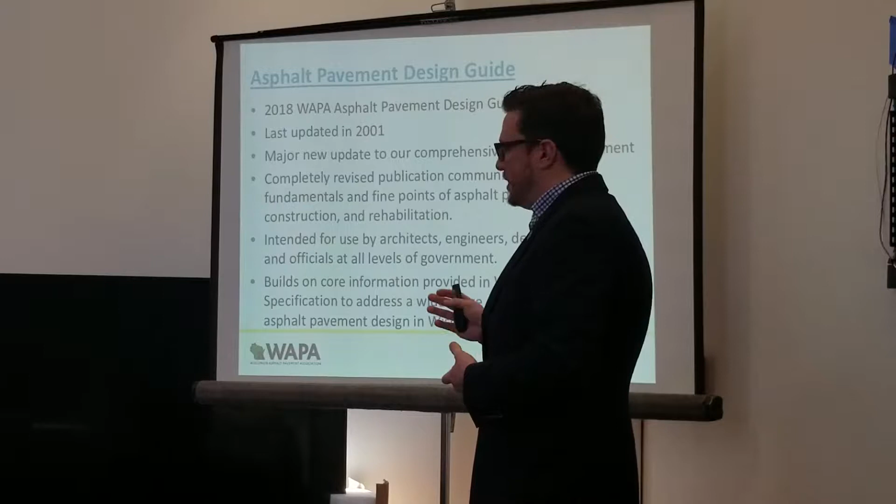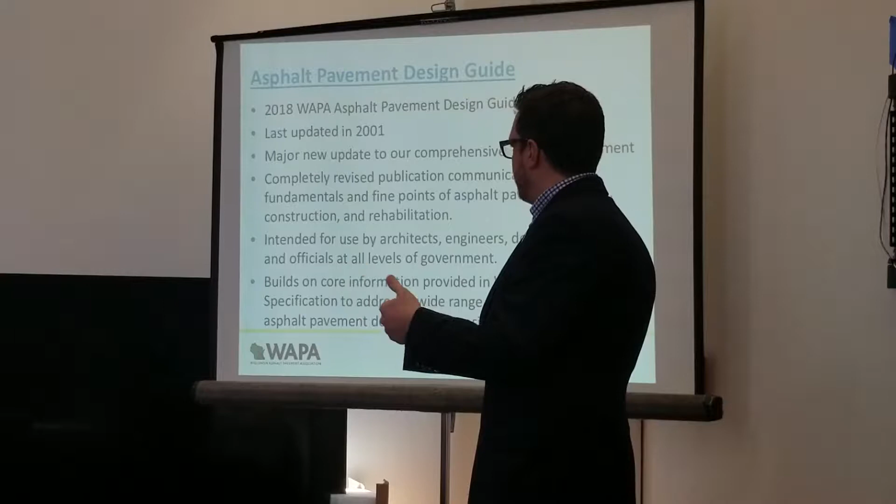Other resources available on our website include an asphalt pavement design guide, a PDF file, with printed copies also available. It's a great resource for picking the right application for your roadways. We also have a parking lot design guide and a whole host of other resources, covering economics like life cycle cost analysis, subdivision street designs on the engineering side, pavement structure designs, and environmental impacts and things to consider when looking at pavement types.

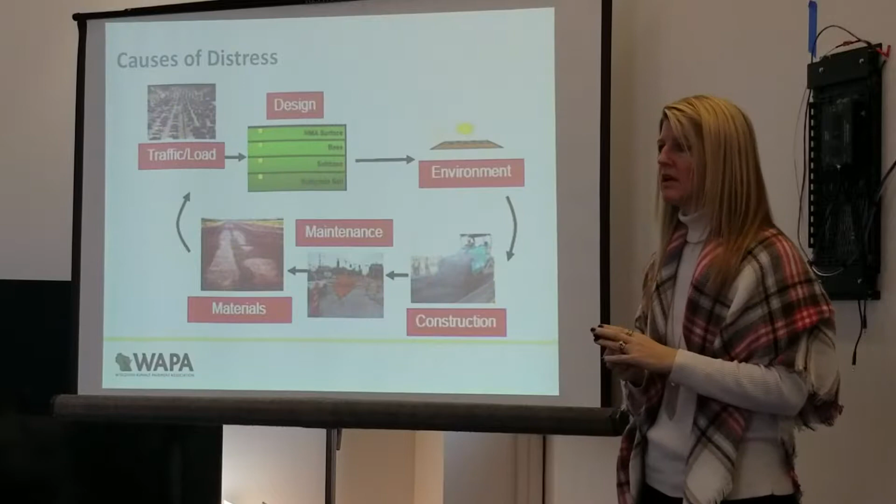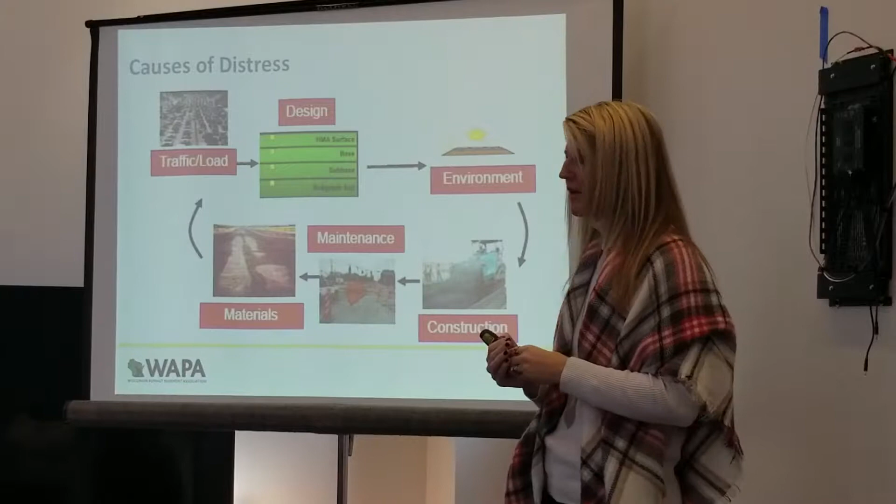There's a lot of different distresses that we have. Traffic loading, the day-to-day traffic, the design, that's the actual structure of the pavement that's out there. Next, the environment. Mother Nature can be a beast, as you well know looking outside. Environment does a lot between the water, the sun, the UV. We talked about a lot of them, the freeze-thaw that we have here in Wisconsin, let alone construction and maintenance materials. I'll kind of lump them all together.

We can take mixes in the industry and make them not perform maybe as best as we'd want them to. There's a lot of things that we can do in the field that might add to some of these distresses as we go.

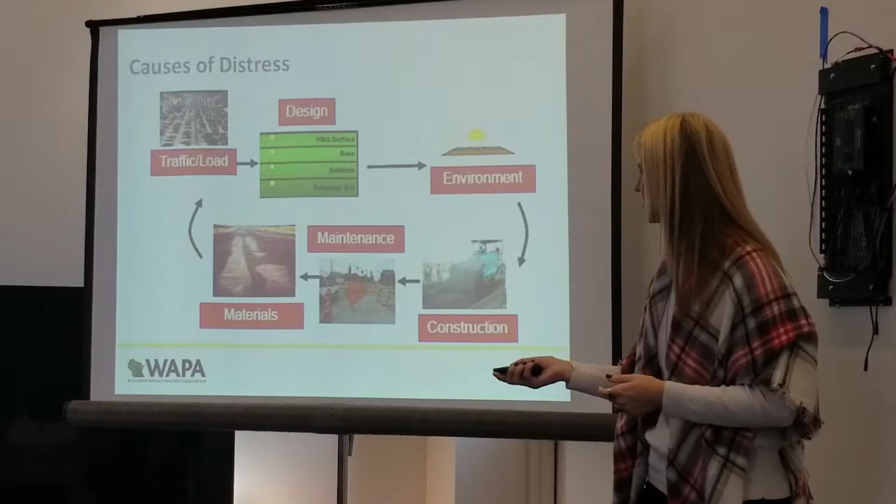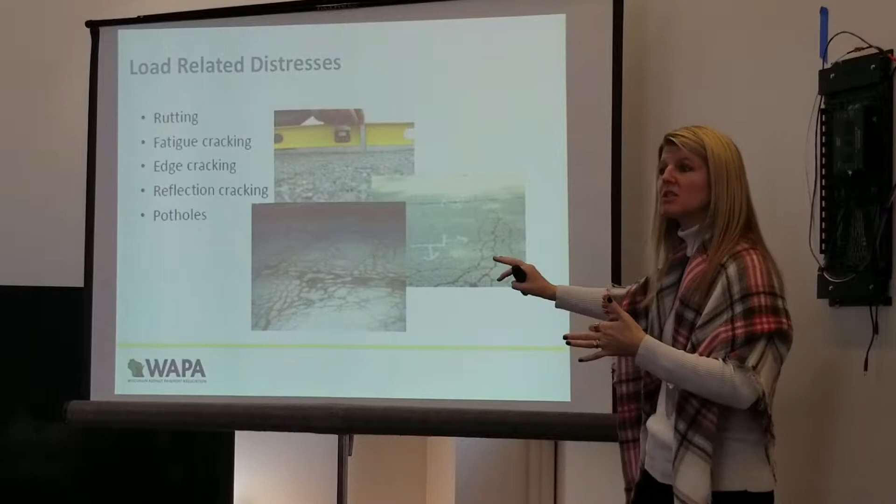So load distresses with the traffic, and some of these you'll see repeated throughout, but what types of distresses does the traffic do? Rutting is one of them. Fatigue cracking, just when you're starting to beat up that pavement. Your edge cracking, some of your reflection cracking, depending on whether it's top down or bottom up. Potholes is a lot of times attributed to the traffic.

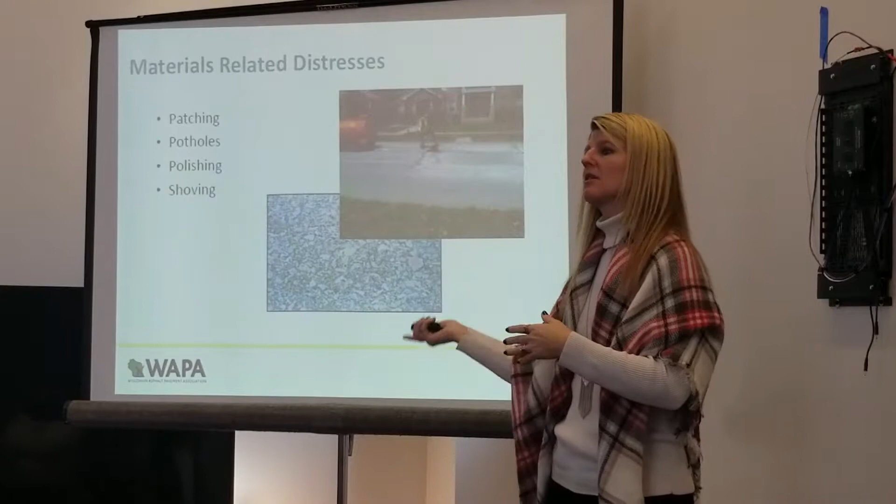Environmental, this is where you're going to start to see your thermal cracking, your transverse cracking, block cracking. Reflection, again, can be from bottom up, from the environment weakening the pavement. Raveling, weathering, materials—if you're doing a lot of patchwork out there, those are going to come back and be areas of trouble for you. Polishing of aggregates, this stuff that you see down here.

Shoving of mixes. Construction, some of the things we can do out in the field, bleeding, right? Our longitudinal joints are the weakest parts of our pavements.

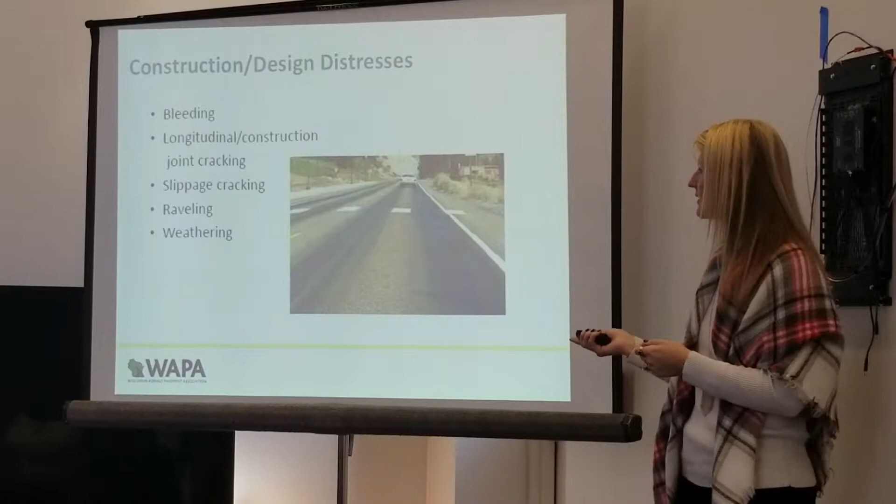That can create issues: slippage cracking, raveling, weathering. So what's the whole package here? What do we need to do to pull it all together?

The first thing is know the treatments that are available, know the treatments that work in our area. A lot of that you guys are doing right now, just collaborating and working together to find out what are your options, what can you do.

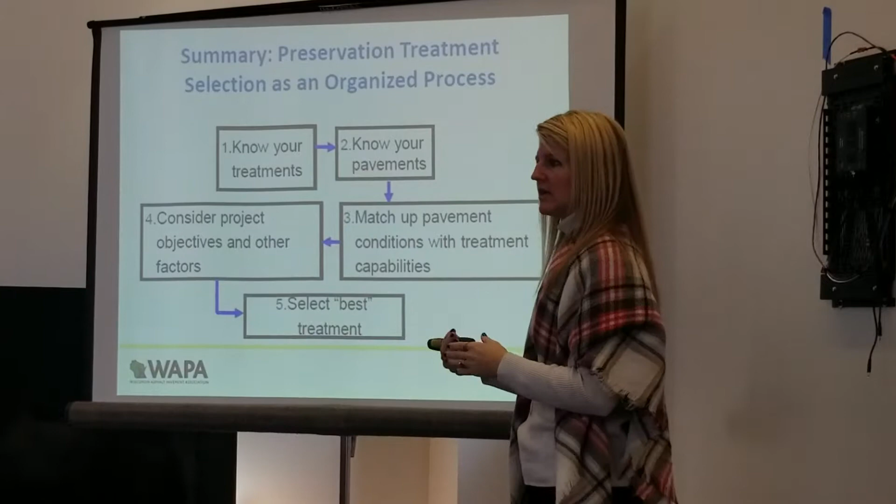Know your pavements. Get out there on a regular basis. I know it says every other year, but every pavement is going to be different, and let it tell its story, because sometimes that slope of distress can start out nice and slow and progressive, and other times it's going to go, and once it hits that critical part, it's going to start to drop rather quickly. So you need to get to it ahead of time so you don't wind up in the rehab and reconstruction parts of your pavements.

So match up the pavement conditions with the treatment capabilities. And then, of course, there's always other things you have to consider, most of the time budgets, which are constraining, and then go with the best treatment that's available.

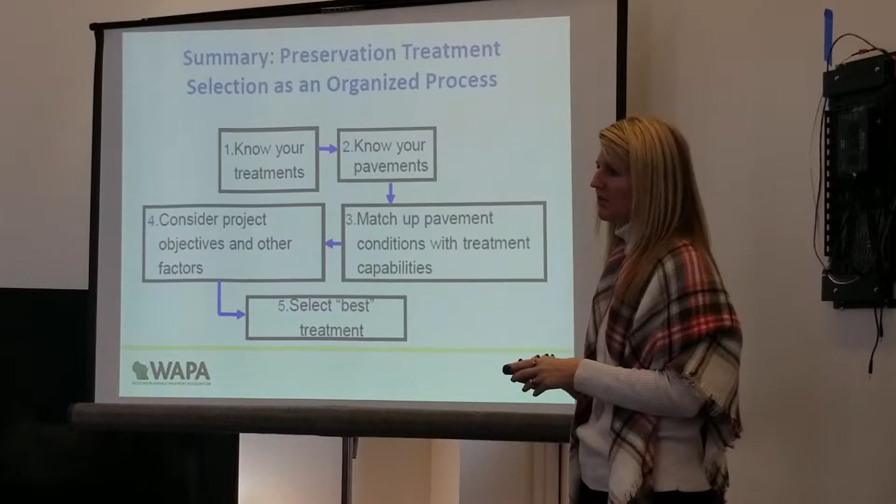So that's what we're going to try to wrap up here. The PASER manuals, it looked like everybody is pretty much aware of what's going on, so I'll kind of whip through this relatively quickly. It's to recognize the distresses that you have, and then give it a visual rating of 1 to 10.

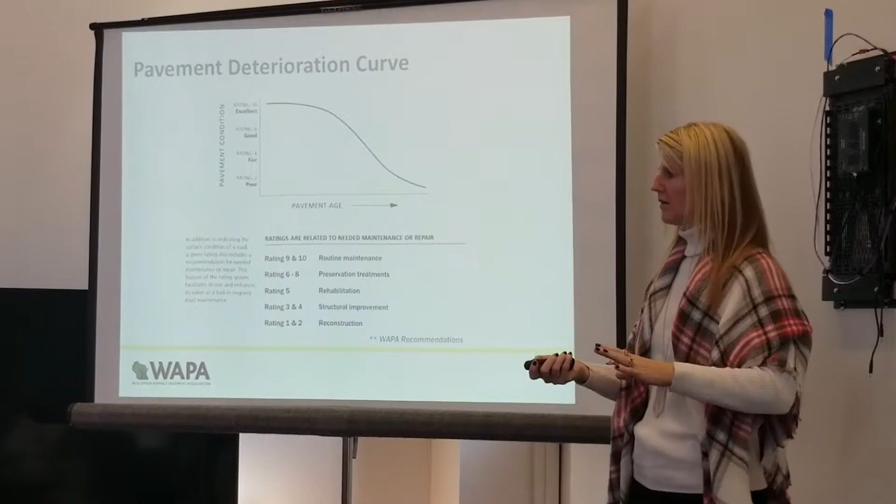I put on here that WAPA recommended, because as Ben was alluding to, we will say get on it maybe a little bit sooner, because there's a little bit more than just that rating there, but anyway, we're going to roll with it. I don't think Ben's going to disagree, otherwise he can definitely come up and disagree with me, that'd be just fine. So we're just going to start real quick.

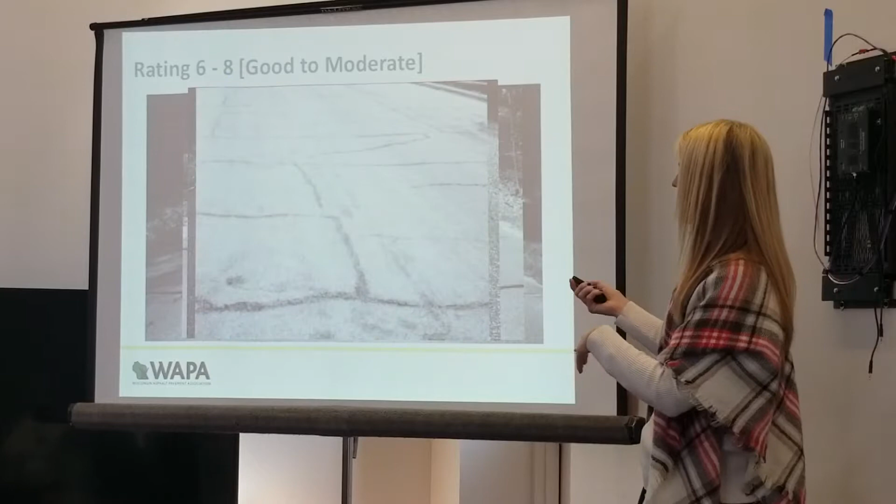But now we're going to move down. This is all of what Ben just spent his presentation talking on. These are still good roads, still in pretty good condition, but you're starting to see some things happen. There's a pretty wide variety of pictures there, so you're covering 6 to 8.

So now you have a whole host of options. Definitely keep up with your crack filling, do patches where they need to be done. Now start looking at all your preservation treatments, everything that Ben was talking about. And then I'm going to talk to you about the thin lift overlays, thin asphalt overlays, thin lays. There's a bunch of different terms for them, but conceptually they're all the same. That's what we're going to talk about.

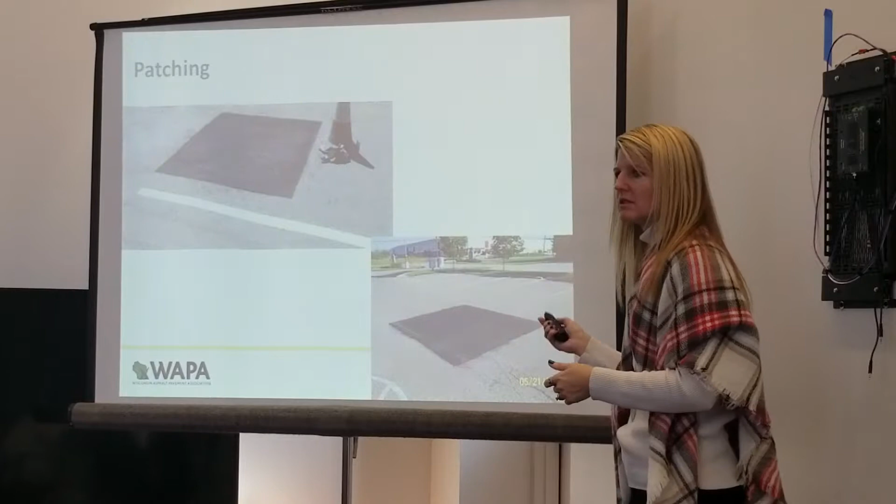Patching 101. Best practices: make sure you take out enough of the material that needs to be taken out, nice clean lines, no abstract art. Doesn't save anybody any money. Don't do that.

Thin asphalt overlays - what are they? They're mixes that are typically put down from your surface mixes, so your 12.5 millimeter down to a 4.75. We don't like to violate layer thicknesses, but it's pretty much anything under 1.75 inches. So it is a thin application of hot mix asphalt.

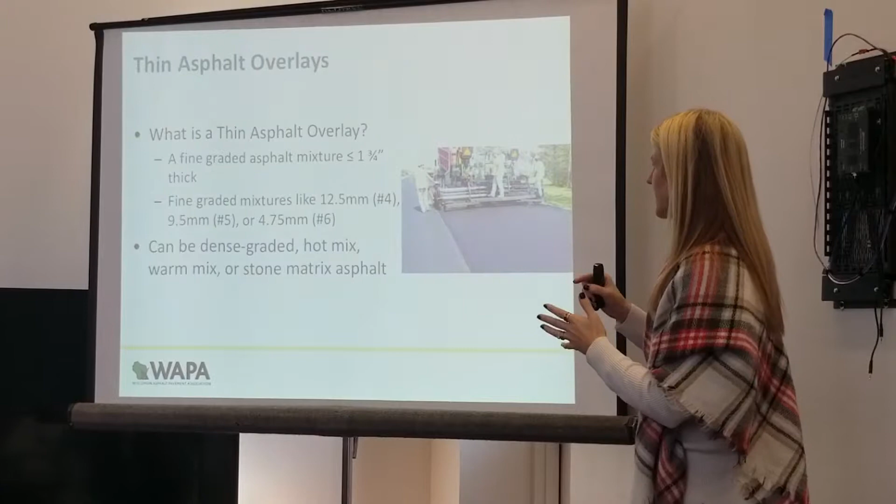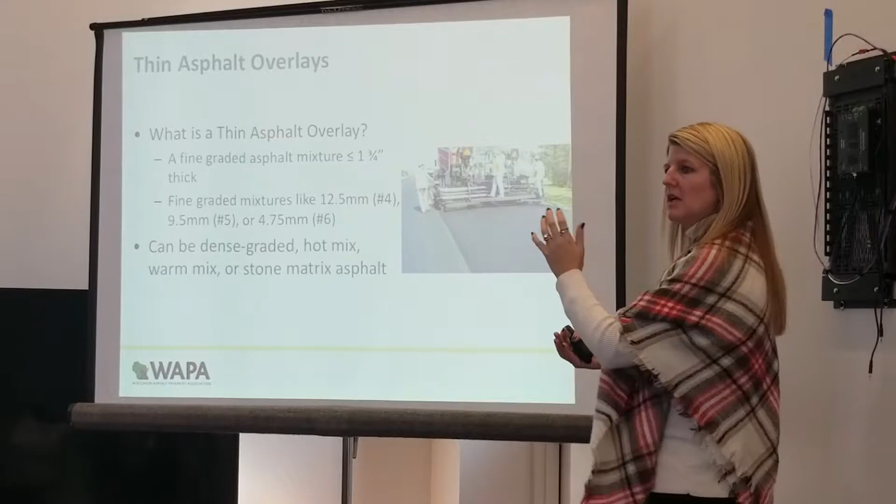Okay, we'll walk through some of these. It can be dense graded, your regular normal mix. It can be warm mix, stone matrix asphalts. We don't do a whole lot of open graded friction courses, but other states do that as well, so if you're reading up on it, you'll hear it. I just didn't add it because we don't typically do that here in Wisconsin.

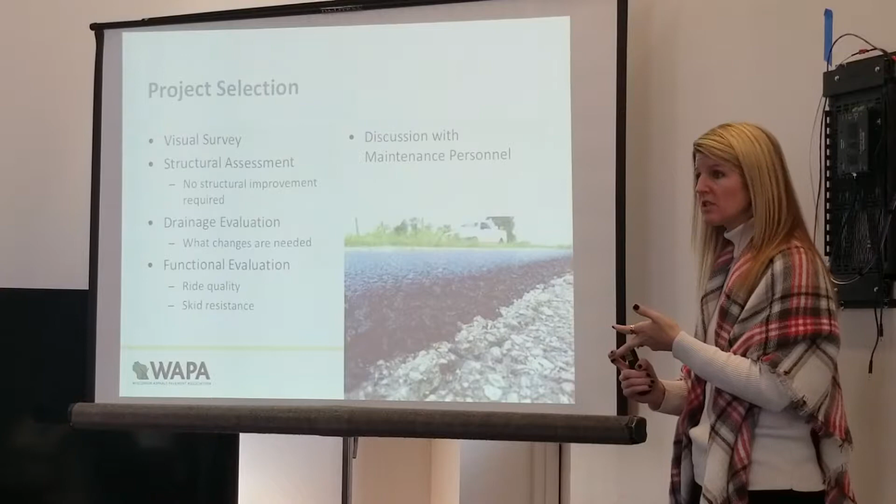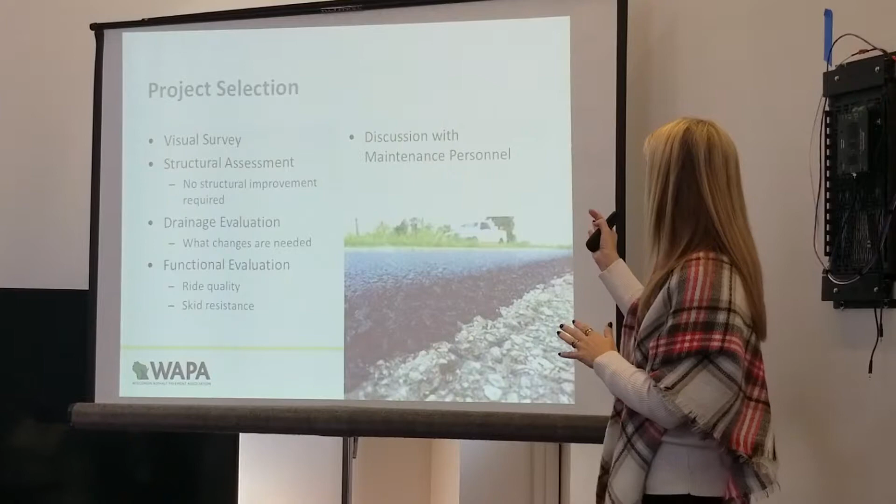It's not to be used on everything. Again, this is not a sales pitch, it's just another tool in the toolbox. Make sure you don't have drainage issues, make sure you don't have any big structural deficiencies that you need to worry about. Ride quality - it'll do something for ride, because you're working with material out there, you're not just following what's there. But if you've got ride going like this, it's not going to solve your problem. Skid resistance, and check with your maintenance personnel - people that really know what's going on with the roadway when it's telling its story of where it's at, they're the ones in the know. When to use it, what can it be used for.

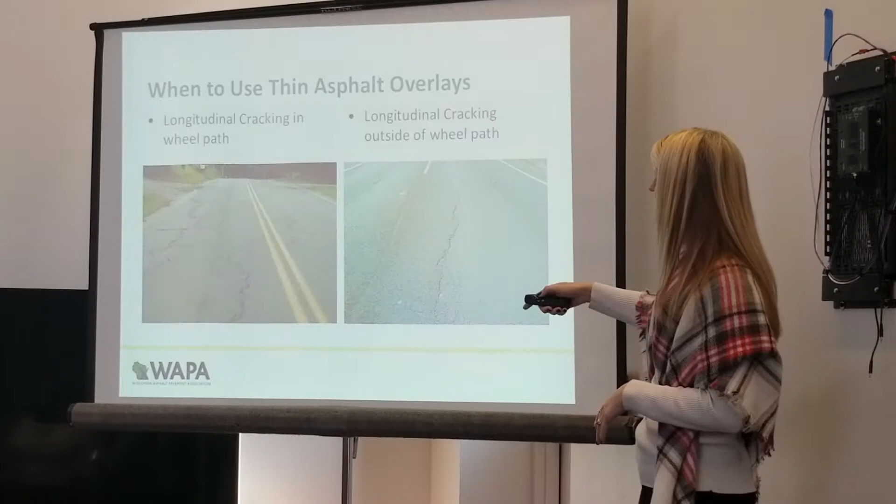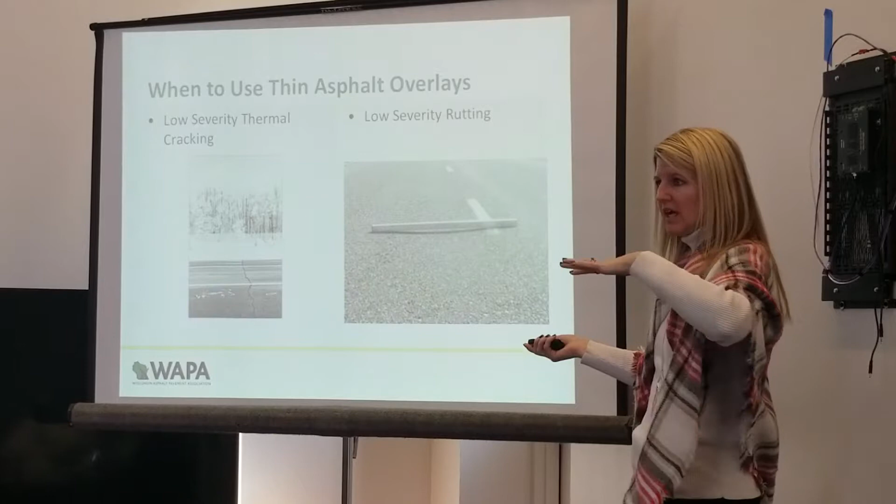Raveled out pavements, polished aggregates is another one. Longitudinal cracking, again minor - we're not talking major stuff, no matter where it is, whether it's wheel path or outside of wheel path. Thermal cracking, transverse cracking, low severity rutting - if it's got a little bit and that thin lift is going to take it out, 1.5 inches or 1 inch, that's fine. This is obviously an exaggeration, but nothing major, nothing excessive. When the road gets to that point, it's time for it to be milled off and removed away, and that's what it needs to do.

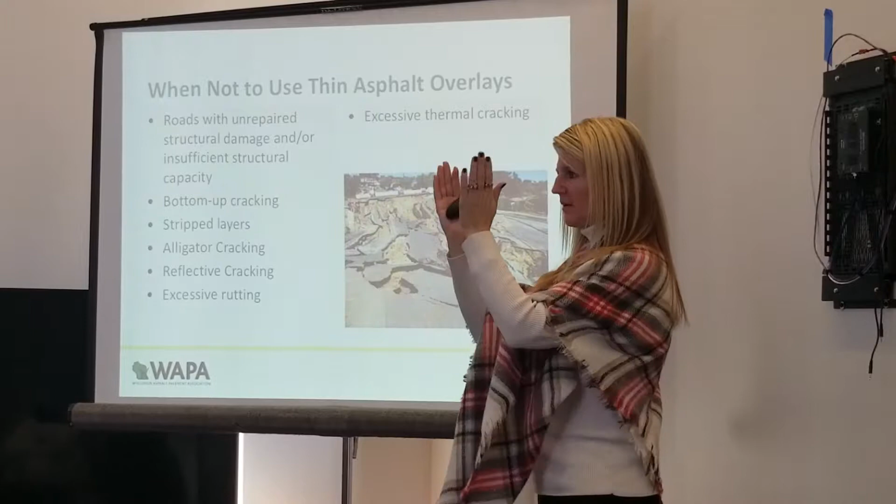Again, when not to use it: bottom-up cracking. If you've got a pavement that started cracking at the bottom and it's coming up, and that crack is just projecting wider and wider, it's not going to help you. You need to fix that crack and then put a nice HMA overlay over top of it.

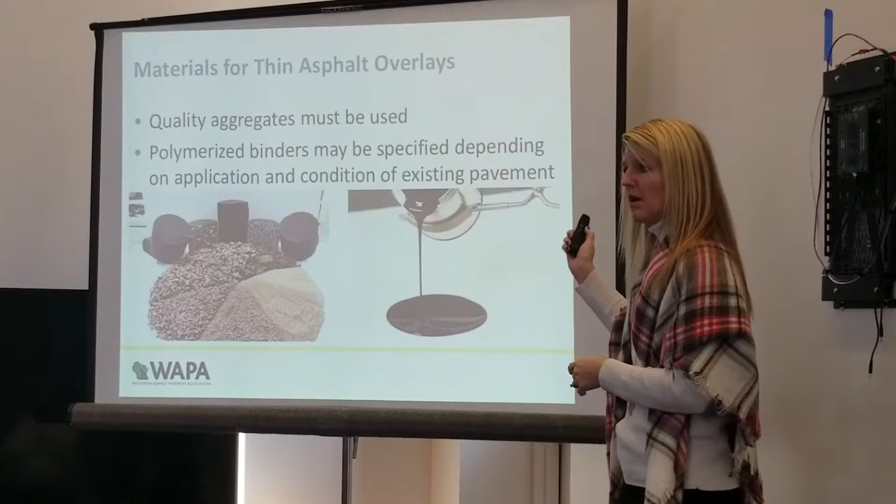Quality aggregates to be used, but it's the same stuff that we make our traditional HMA out of. The mix, I won't say is identical - it's not just taking a regular 12.5 millimeter or number 4 mix and putting it out there. We will typically put in some modified ACs, and we actually increase our tack rates just a little bit. Not that we've doubled it, we're getting close. But we do put some attention to detail.

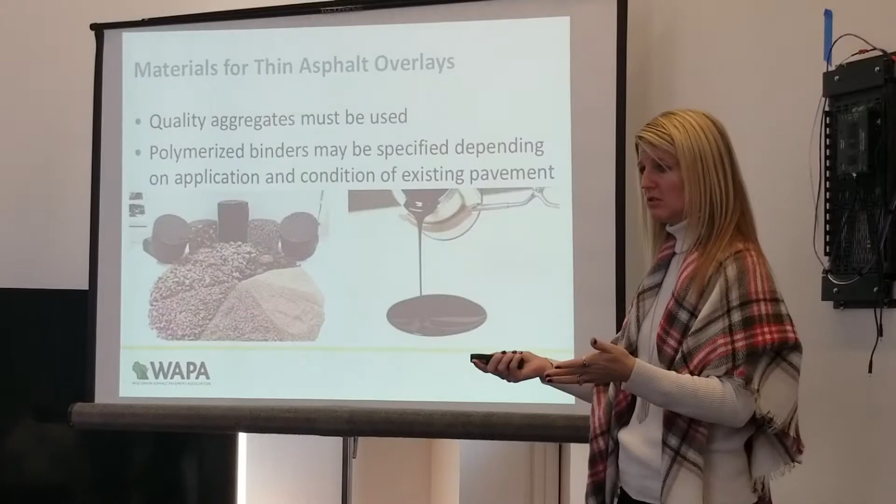There are special provisions within the DOT specifications for this. We have all of it at the association. If you'd like to do some of it, reach out to your contractors or reach out to us - we can help you with that.

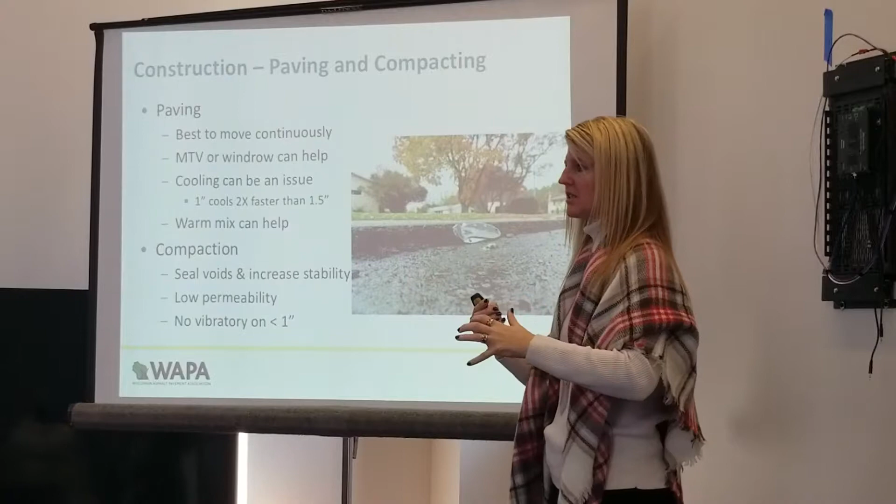Paving is pretty much the same. It's thinner, so it's going to cool off a lot faster. You pretty much don't want to stop the equipment - once it starts, you want to go with it. Because if you're paving 1 inch thick, that'll cool off twice as fast as if you're paving 1.5 inches. That doesn't allow us a lot of window of opportunity to get everything rolled and compacted.

The other thing we might put in there is a warm mix additive. That's not to decrease the temperature necessarily, but to aid in the compaction of the material. Basically, it just tricks the mix into thinking that it's hotter than what it is. That way, if the temperature is starting to go down on us, it's still very workable. You don't want to do this late season or early spring - you want to have the temperature and the heat in the pavement. You don't want to battle that.

Compaction, the density of it, is the same. Typically, we don't use any vibratory rollers once we get less than 1 inch, because we don't want to break the aggregate - we don't want to hit the underlying layers and break the aggregates. But like any mix, we want to make sure it's consolidated, it's densified. We want really good compaction of that mix because we want it to be low permeable, to keep the water out.

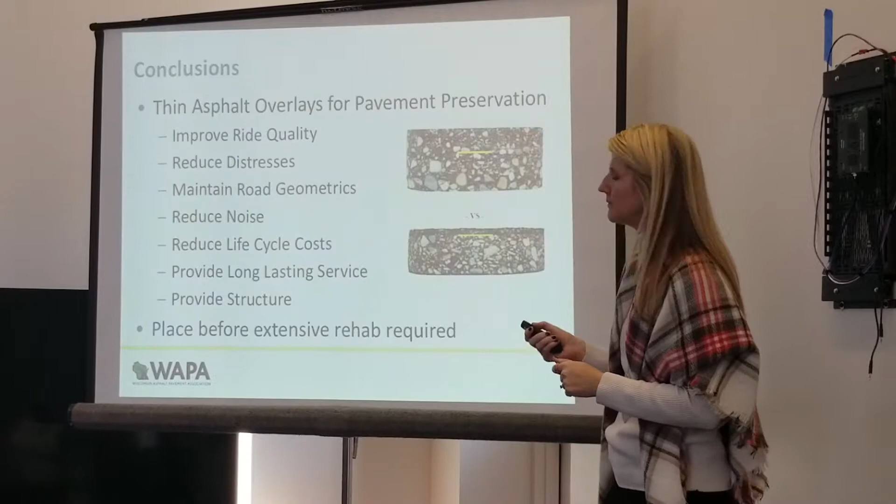I just wanted to point out this is a demonstration project that we did in the city of Platteville. The city of Platteville has been doing thin overlays for over a decade. We recognized them at our annual conference with an Asphalt Innovation Award. You can either mill off the pavement and put down a thin asphalt overlay, or the city of Platteville just puts the thin asphalt down right over what's there and existing. So it adds structural value to the roadway that's there. Just two different approaches to it, but I wanted to point that out.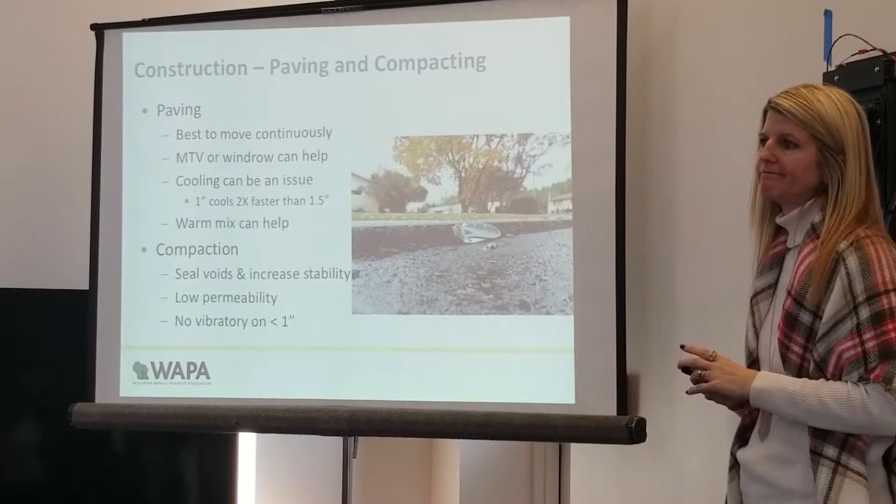We have a number of counties that use a lot of thin overlays as well. So don't be thinking in terms of just state projects - there's a lot of local units of government that are using this. Sometimes they will go straight over the gutter pan. We can reach out and talk to them if you want more specifics.

City of Milwaukee is another one I couldn't remember on that. They call it the high impact paving program, and that's more about letting the neighbors know: hey, we're going to shut down this road for 3 blocks, but you're going to leave in the morning, and when you come home, you're going to have a brand new road. That saves a lot of money, right? Yes.

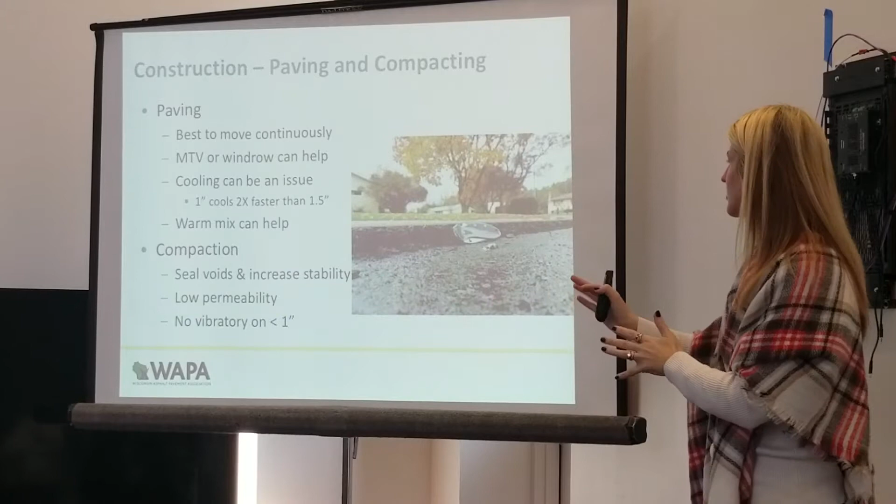Yes, potentially. And granted, what we're gonna start talking about now, because again, this is in addition to your surface treatments, right? We're still talking about the maintenance side of things. So you're gonna pay more for it, but the expectations are also greater for it. And so you'll start to see those breakdowns in life and cost in a second.

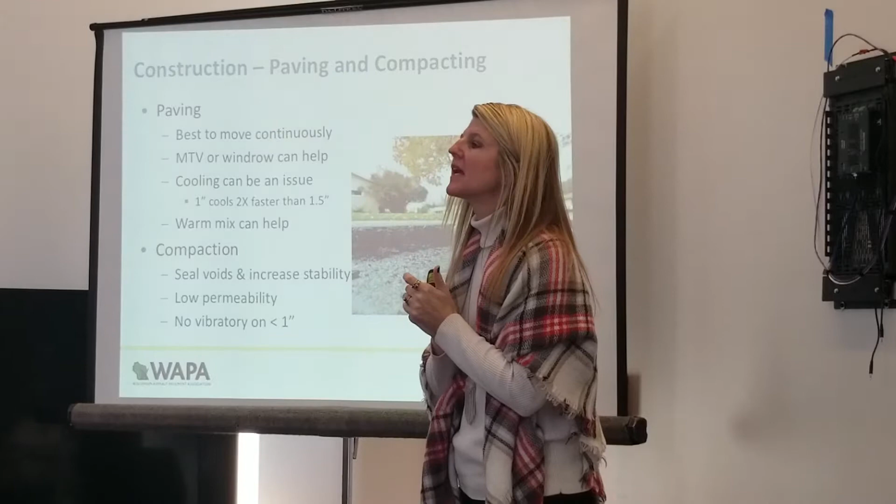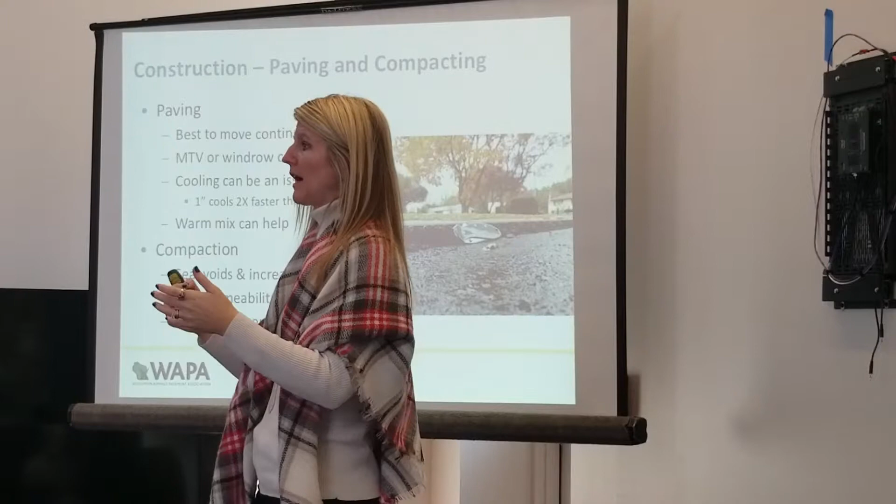I saw that hand first. Yes, go ahead. Two questions. Is the ratio of the tack coat the same with this thinner? So it is now currently written 0.08 gallons per square yard, but our application rate for regular tack used to be 0.025, so that was a lot. Now that we've doubled the rate to 0.05 to 0.07, it's pretty close, but if we're gonna do this project, yeah, we're still gonna put down a 0.08 probably, or at least go to the high side of 0.07.

Are municipalities really doing this with curb and gutter? I'm trying to think like storm inlets and stuff. How are you building up? When you can't, they'll mill off. They'll mill off and then put it back, but at least then you're not doing a 2 inch or whatever. You can take this down to 3/4 of an inch. So I'm saving in materials, because I'm still milling. You're still milling, but you will save in the materials.

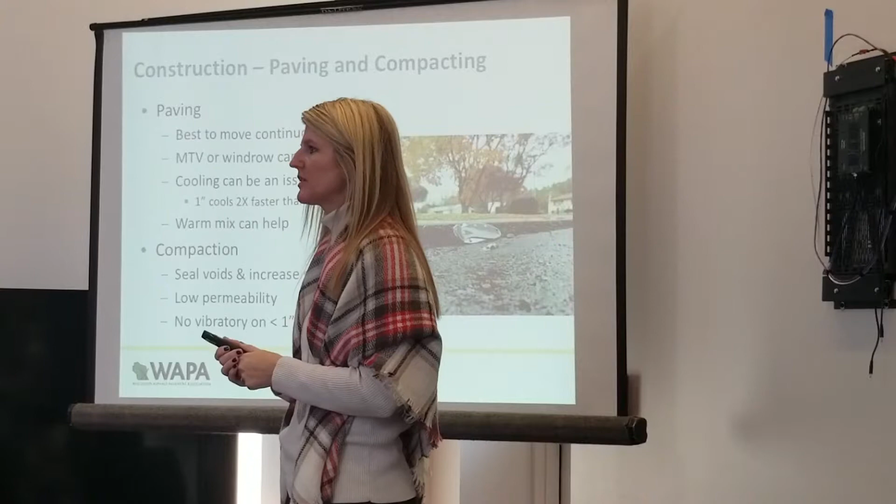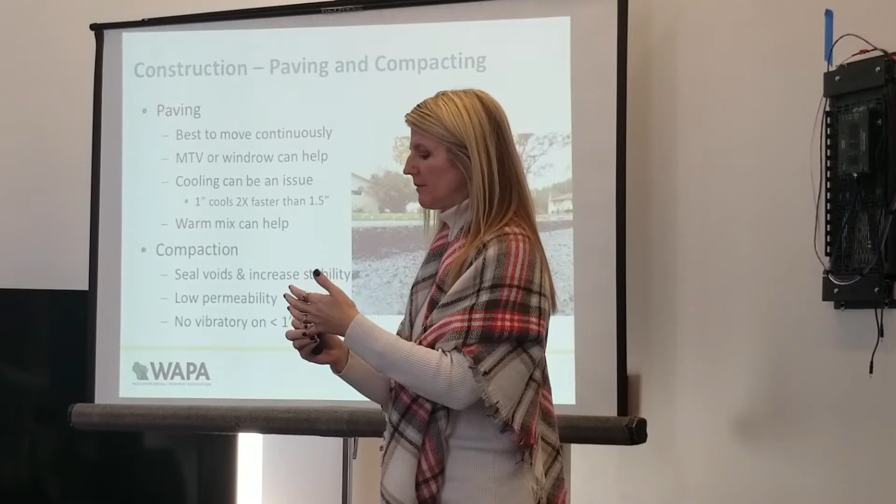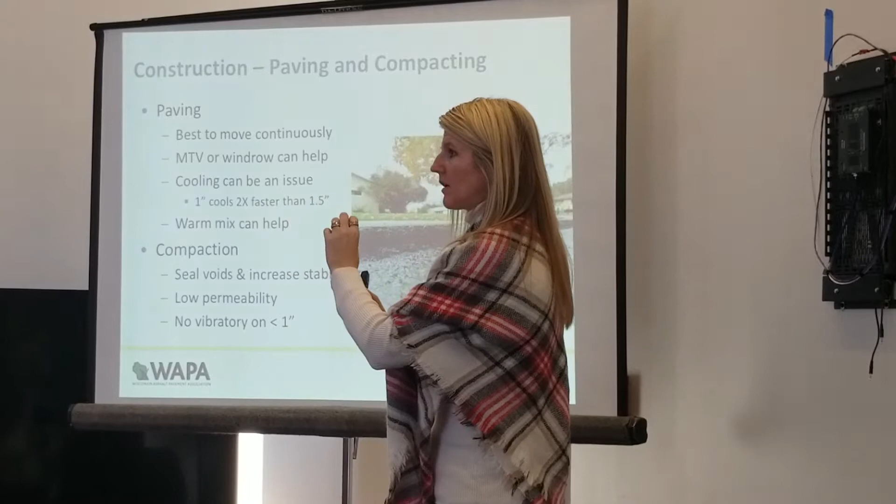And again, there are some things that make this unique. Not to get in the nitty gritties, but we look at the fracture, that's the angularity of the coarse aggregates as well as the fine aggregates. So that's something that changes. Our VMA, which is a whole other thing about, without the asphalt, what is that structure telling you, and the air voids there. So there's a lot of other things that make this unique. This isn't just, okay, I'm just paving thinner. Not really. We're giving you a better performing mix to do this.

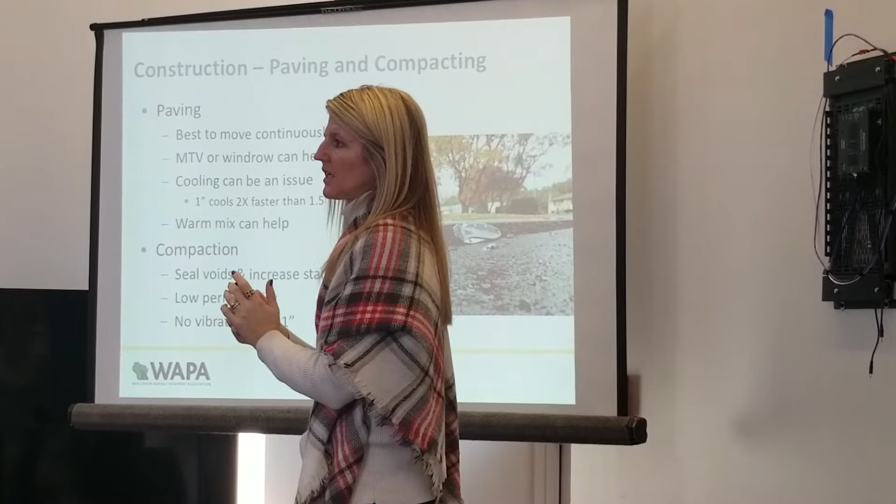Are the air voids the same? The air voids are designed. Right now we're doing regression, which means we design them all the same and take the air voids down. This one we design to a 3% instead of a 4 with regression, or it's still 3% with regression, but we design it straight to 3 with this one.

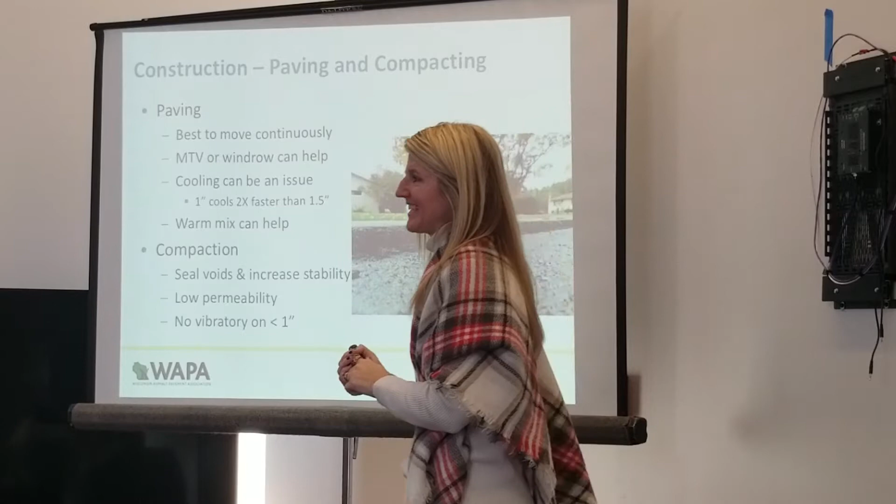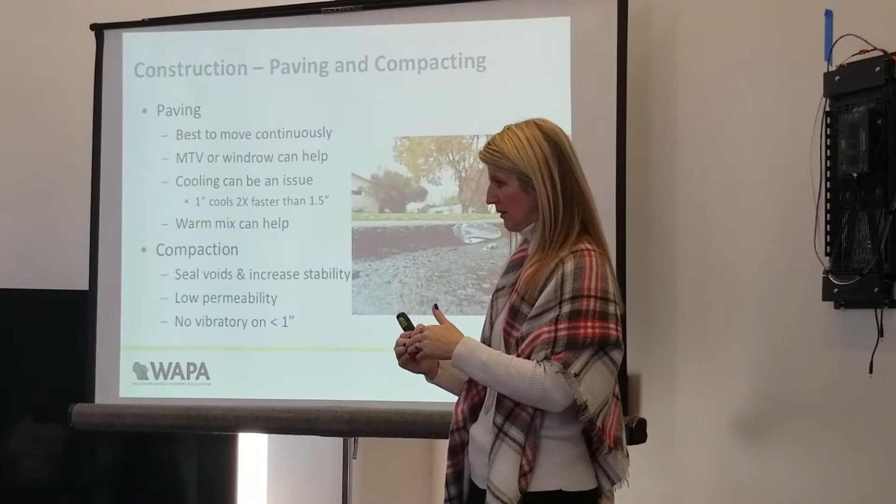Yes. So how about crack propagation through the base layer? Because it's so thin, do you experience faster reflective cracking? Typically not faster with the thin lift overlays, based off of all the things that make it unique between the aggregate that we use, and we typically will put in a highly polymerized asphalt, which a lot of times isn't happening with the traditional overlays. That's just a standard grade, and that will help mitigate the cracking. But asphalt is flexible, so the cracks will come up. It's just delaying them and pushing them off longer, hopefully.

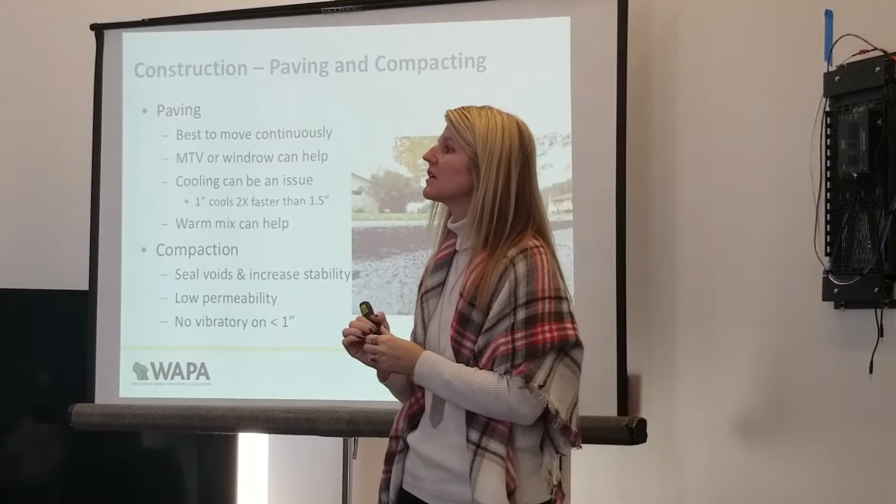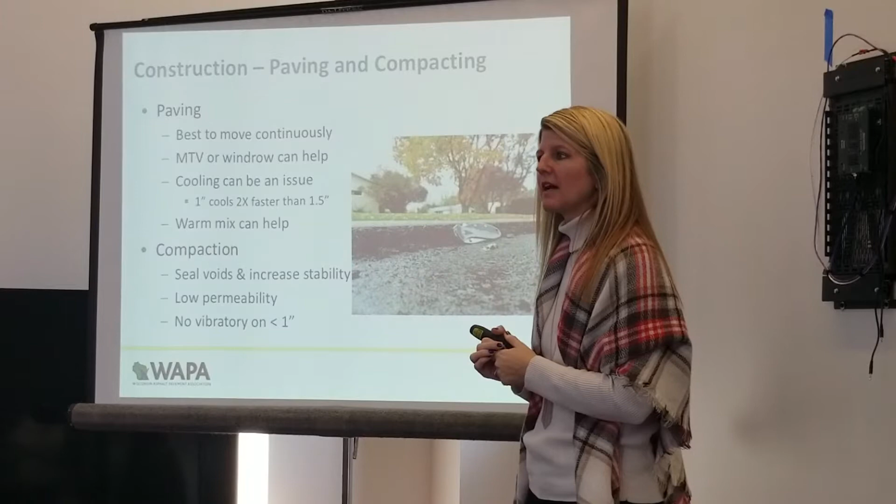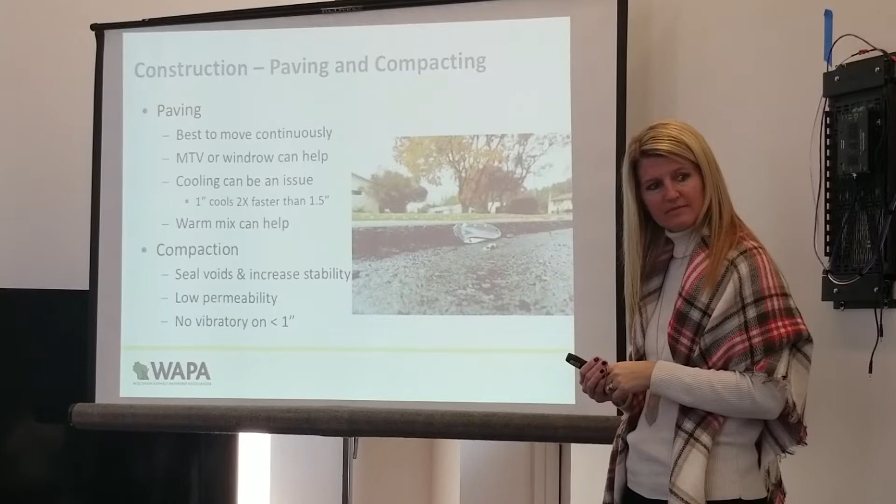Can you use fabrics underneath that to expand over those cracking areas? I would have to see who's done anything with fabrics, to be honest with you. We've kind of gotten away from it a little bit, but I know a lot of locals do. I would have to go ask for their experience. I know that Platteville doesn't, Milwaukee doesn't. I can't think of any local entities that have with the thin overlay. But we can check. If it's something that you'd like to know definitively, please just drop us a business card or something. I'm happy to ask the question and see what we can get.

Anybody have any other questions? Sorry, I get on a roll and I just get excited and I just keep talking. No, I stopped you.

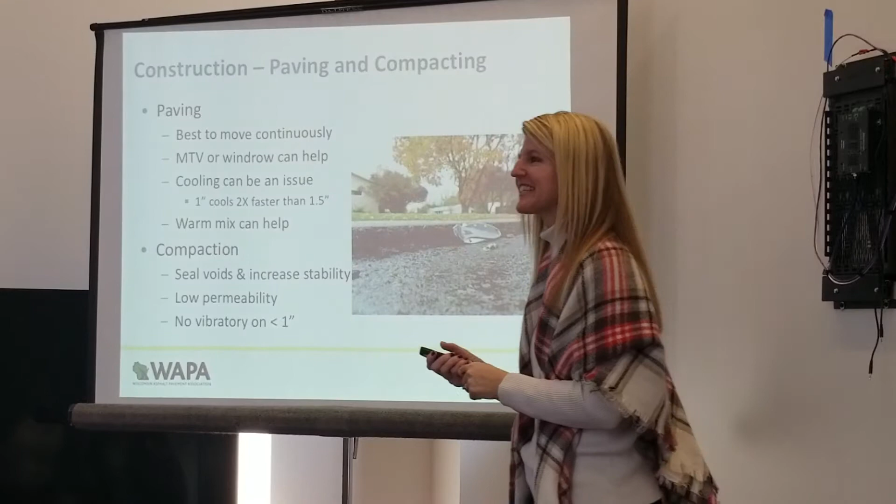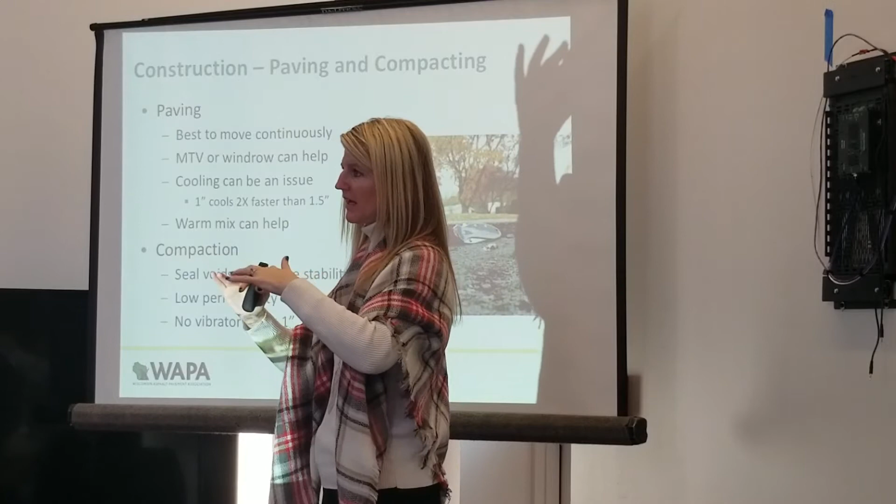Yeah, thank you. If it's more flexible, do you receive more rutting, or on the thin layers is there rutting? So far, no rutting that I'm aware of, and probably because it is thinner, it probably even helps. Because most of the rutting will be reflective of what's underneath. So if you don't have rutting there, you'd have to have subpar material to get rutting in that surface, and this isn't, as long as it's done correctly.

Okay. Do stop me, because otherwise I'll keep going.

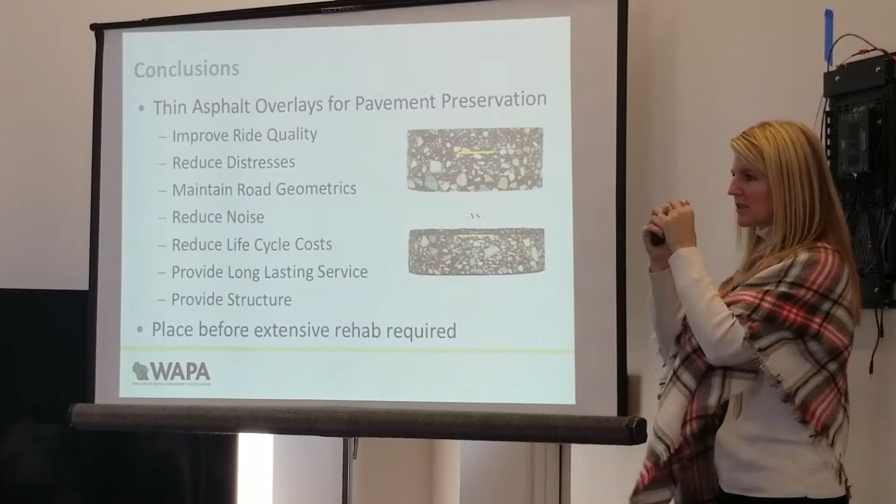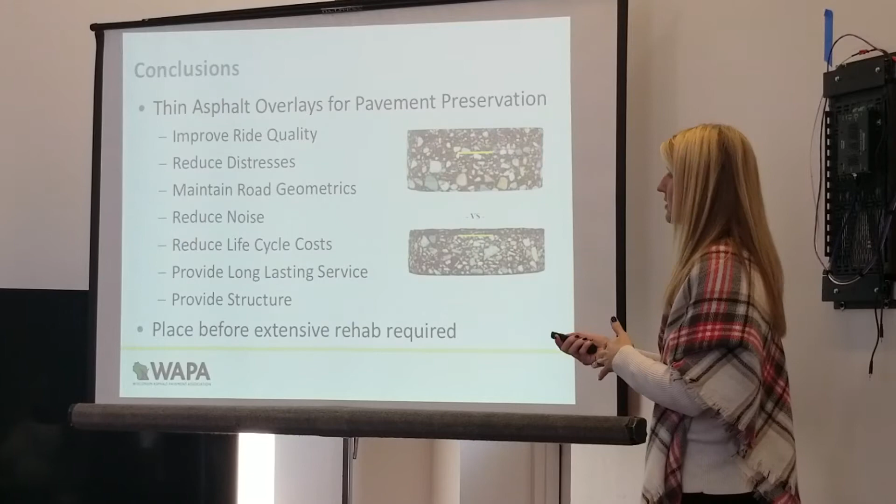There's a whole list here you can read of what all this is, but typically, if you're doing the regular pavement treatments, they're thin, they're going to follow what's out there. This gives you a chance, at 3/4 of an inch up to 1.5 inches, to really improve your ride, improve the crack delaying that you're going to get, gives you some structure, reduction of noise, all those types of things. So there's a lot of benefits to it, but it is definitely going to cost you more. It's being able to break that cost over time.

So that's what I want to get into right now. The chart that Ben had in his presentation is pretty similar to this one as far as we've got distresses over here, and then the different types of applications up on the top. So we tried to break this down for you. This is on our website, so all these next ones that get really detailed, you can find on our website.

No, you're good. I just wanted to mention, I think that this may be instructional. If you guys take anything away from our part of the presentation, it's the next 3 slides, and they're available on our website. But again, and you'll see it over the next slide or two, when you're comparing a chip seal versus a micro surface, just understand that they're addressing different distresses.

So if you have a low level of thermal cracking due to our temperature in Wisconsin, maybe a chip seal might be a good candidate for you. If you're seeing more thermal cracking from the environment after a harsh winter, maybe a scrub seal or a thin overlay would be a better candidate to look at. So again, all of these are really good tools in your toolkit, as somebody mentioned. I really like that, because I think there's a place for all of these different treatments. It's just finding the right place and the right time, and what are you trying to address?

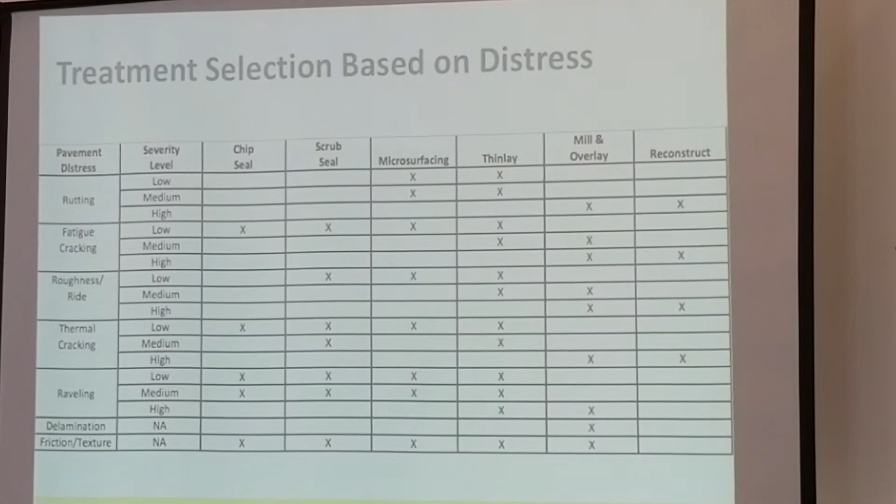Is it fatigue cracking? Is it bottom up cracking, or is it top down cracking? Is it roughness and ride, or are you just looking for a better riding surface? Hopefully the next 3 slides will help you walk through that, talk about life of all of those different treatments, and then what that's going to cost. So do you have a comparative pricing, just 1x, 2x? Yeah, it's coming. It's gonna be my next one.

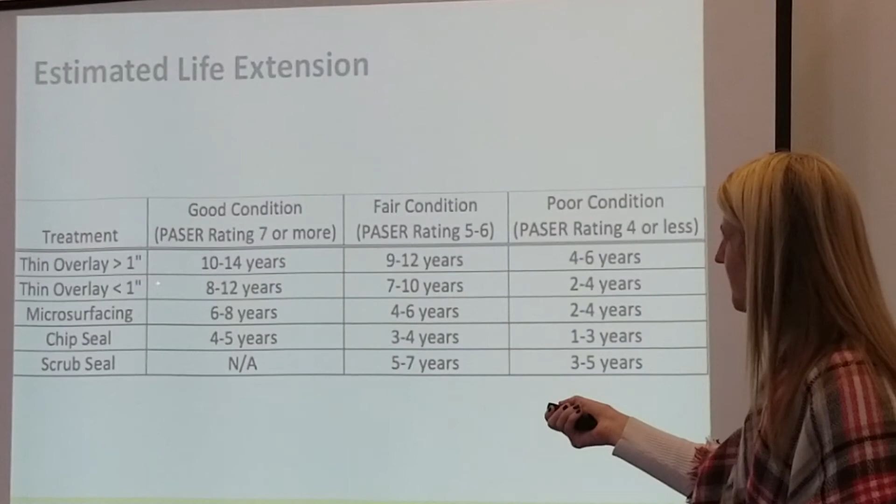What I wanted to break down for you right now would be years. What is your expectation? And again, some of it depends on when. So we tried to break up the thin overlay, because there is a difference if you're gonna put 1.5 inches on versus 3/4 of an inch; let's keep it apples to apples. Then we picked these 3 to do. If there's one of these that you wanna know, like the slurry seal, let us know. We can dig up that information for you.

We reached out to our associate members. We wanted it to be as unbiased as possible. Like Brandon said, our producer members don't really do much of this other than the thin lift overlays. So we started with a PASER rating of 7 or higher; these are the expectations. Ballpark, if you're into your 5s and your 6s, and then your 4s and down. So that's how we broke down the years you can expect of these surface treatments. And then these are the dollars and cents of it.

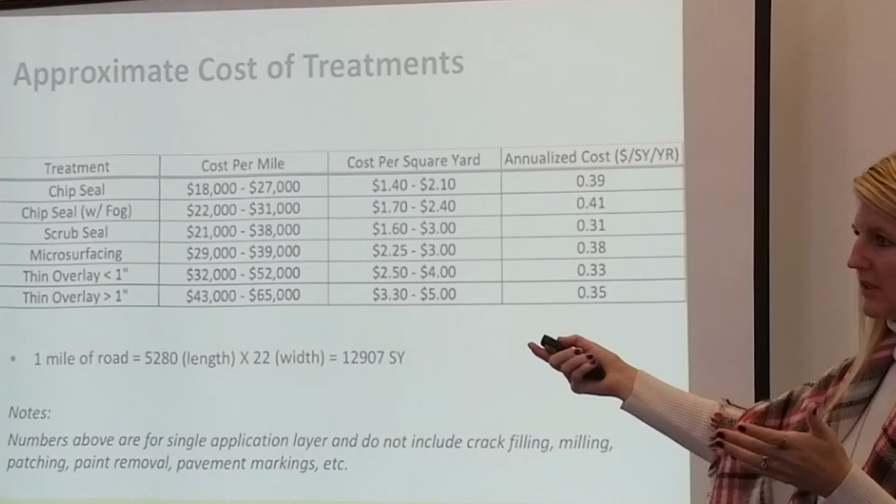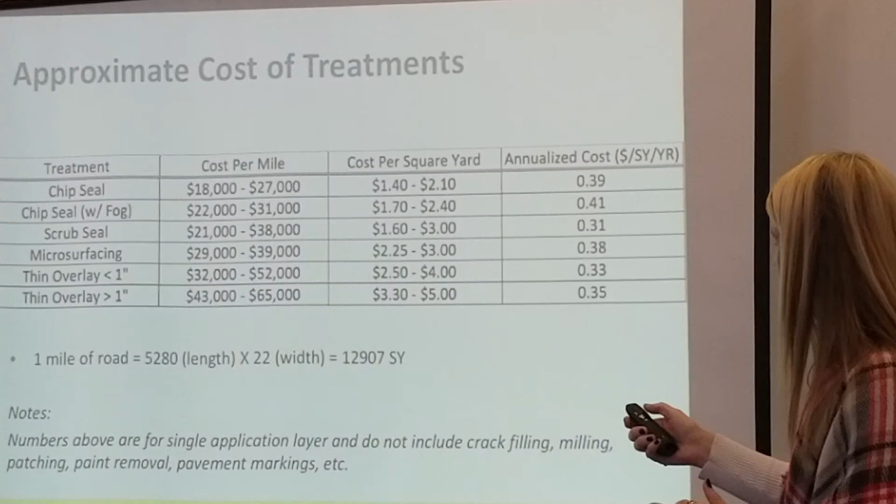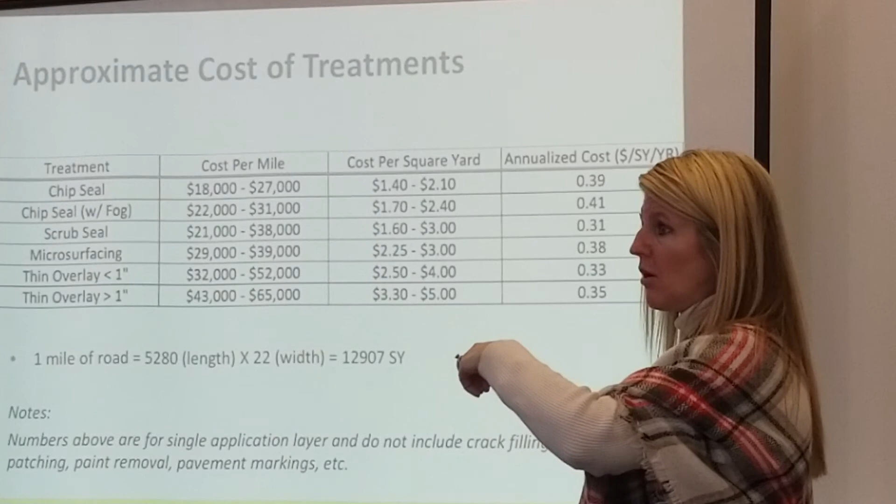We broke it up, and there are ranges. We understand that it's anywhere from A to B, so we tried to encompass all of those ranges. This time we added the chip seal with a fog, because it's not that much money per square yard to put a fog seal over a chip seal, and they're recommending it. The ones we reached out to want to fog over it right away, because the whole idea is to encapsulate that aggregate into that binder and hold it there. Putting over that nice layer of emulsion will help seal it all in together. So they're recommending fogging over the chip seal.

So when you do a chip seal, you're chip sealing and coming back the following day to sweep and then following it up with a fog seal? Yes. I'm just trying to figure out the days that you would be interrupting traffic. I think it's just the one day in between before they fog. And then you fog, and as soon as the water is out